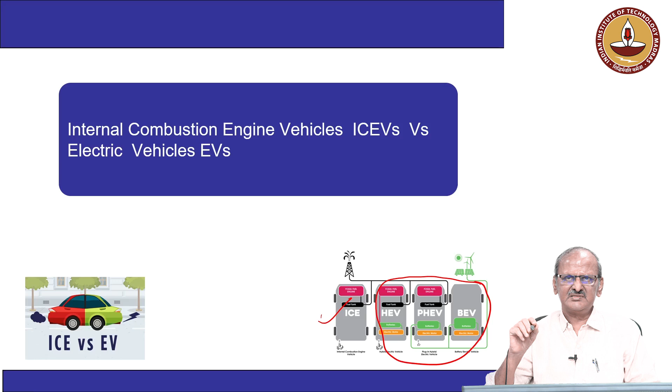In the next lecture, we are going to discuss internal combustion engine vehicles, which are the current portfolio vehicles we use, versus electric vehicles, EVs. People started calling them ICE vehicles, internal combustion engine. It can be petrol driven, gas driven like LPG and CNG, or diesel driven. These are all called IC engine vehicles. Now we are going to compare that with all-electric vehicles: what are the features, the benefits, and how it is achieved.

If you take this example, this is a gasoline vehicle. Gasoline is nothing but petrol, and you have the all-electric vehicle. All-electric vehicle means a battery electric vehicle, not a hybrid, not a plug-in hybrid. If you take the IC engine vehicle, the important components, aggregates: primarily the prime mover is the internal combustion engine. Those not familiar with automobile engineering can take any very basic automobile engineering book to learn about it. Combustion is happening internal to the engine.

What is an external combustion engine? A steam engine. You put coal under it, firing happens, the boiler produces the steam. So this is the internal combustion engine. Then we have the fuel system, the fueling system. Then you have an exhaust system, a fuel pump, a fuel tank and fuel filling facility.

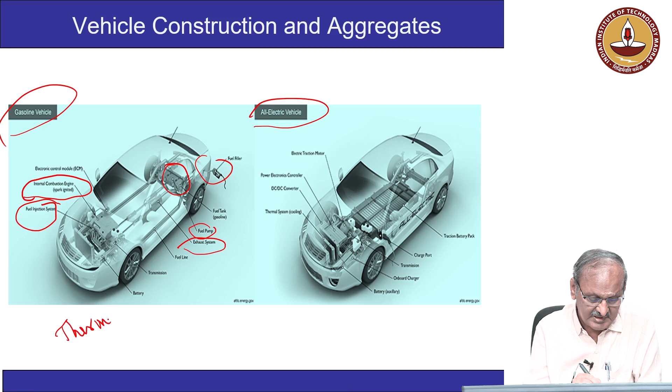Then here you will have a thermal system: thermal management, cooling system. Then you will have an air intake system. Then HVAC, heating, ventilation and air conditioning. All these are part of the current vehicle portfolio. Also, you will have a transmission system: the clutch, gearbox, gear shift mechanism, all that.

Then you have the connection. If it is a front drive, it is connected like this, or if it is a rear drive, you have a propeller shaft, center joint bearing, then rear axle. All this is part of the transmission system. So it has many rotating parts, many actuations, like a gear shift mechanism, a clutch mechanism, and all that.

As compared to that, if you take an electric vehicle, the basic prime mover is a traction motor. This is what gives the drive to the wheels. The traction motor is energized by a traction battery pack, which gives the energy to the motor. Whenever electric energy is supplied to the motor, it will start working. How is that done? With the vehicle control system, you have the accelerator pedal, saying I want to start, move, or accelerate the vehicle.

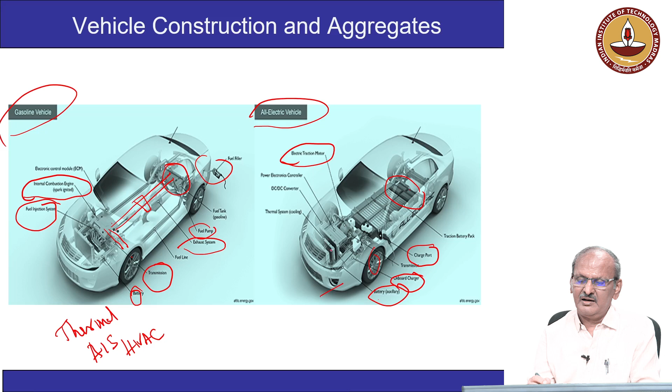Then you have an auxiliary battery, synonymous with the battery here, which takes care of all auxiliary requirements, like lighting, wipers and such. Then you have a thermal cooling system. It can cool the motor, the battery pack, BTMS, and also the power electronics, depending on the configuration. Of course, the HVAC system is similar, but the drives and other things are different.

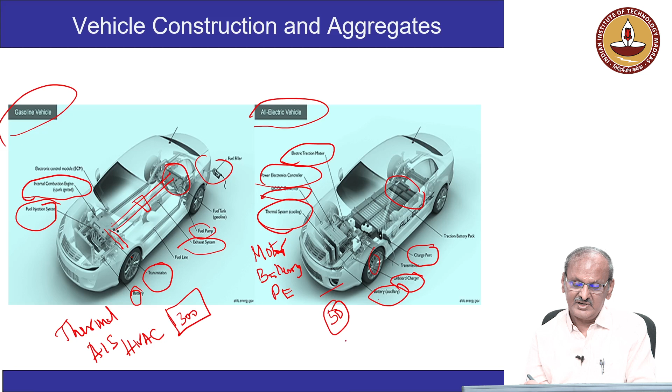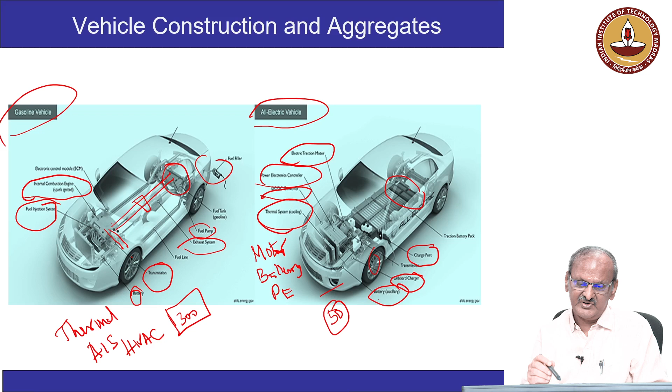Then you have a DC-DC converter and power electronics. All these are the aggregates. As compared to that, see the number of parts. For example, if 300 parts are there, here it is only one-fifth or one-sixth of that, only 50 parts, because so many parts are removed. Because of that, maintenance and attention required are less, less vibration, easier to maintain. All these are the benefits when you go for the electric vehicle.

So here are all the losses. If you take whatever energy you give, internal combustion engine, 1 liter of diesel or petrol, what is the calorific value, and what are all the losses? It has several losses.

Engine loss is 68%, because the IC engine is capable of giving delivery of about 30% roughly. The remaining 70% goes as waste heat through the cooling system. Heat is lost due to the exhaust system, also frictional losses - thermal losses such as radiator, exhaust, combustion and pumping, frictional losses, all of it.

Then auxiliary electrical loss, idle loss, then drivetrain loss. Every joint, every bearing also has a lot of friction. When the work is done, a lot of heat is generated, which is also consumption of energy.

Power to the wheel comes to only 16 to 25%. So we give, say for example, some X kilocalorie from the petrol, but what you are getting as output, power to wheel, is only 16 to 25%.

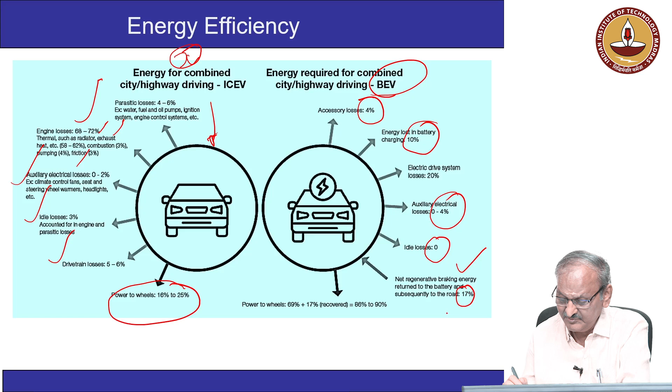If you see the electric drive system, the motor itself is 90% efficient, but if you take all the transmission and other parts, it is 20%. Even though it is 20%, if you deduct the gain, net power to the wheel is 69%, plus you are getting 17%. The net benefit is that 86 to 90% is the total gain.

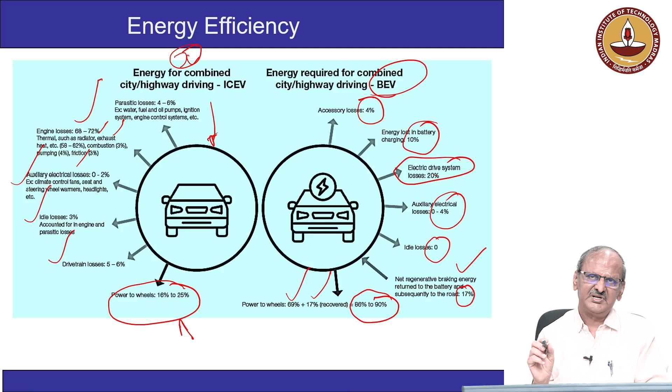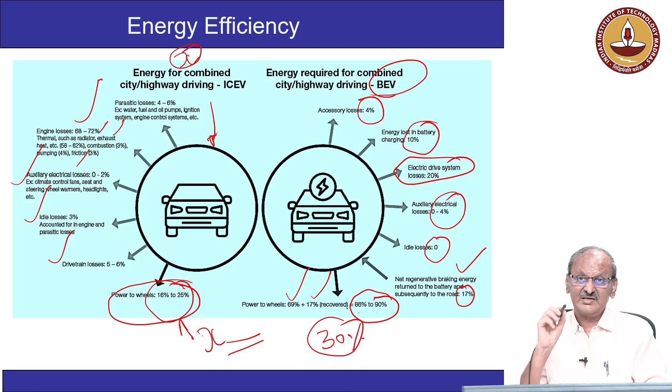So as compared to that, the electric vehicle is efficient in terms of energy usage. Whatever you give as 1 unit of current, you are getting recovery to the work done to the extent of 86 to 90%. Whereas for 1 liter equivalent calorific value, if you convert calorie to electric unit, this is only about 30%. For the same work done, the electric vehicle will consume only 30% of the energy. That is the biggest gain with the electric vehicle.

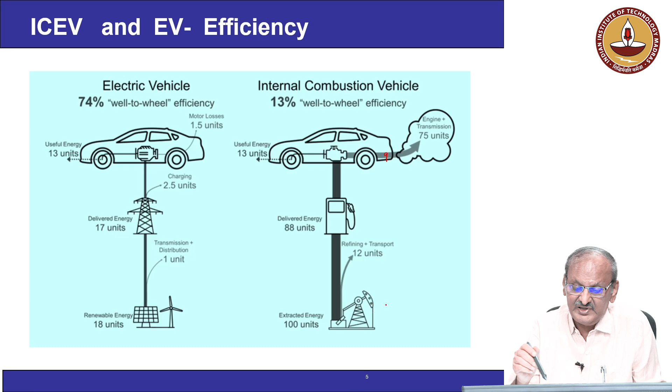So there is another parameter called well to wheel. You get it from the oil well, it is extracted, then petroleum refinery, then petrol is the output that is transported, sent to the pump, then filled to the vehicle. You have lot of losses, even evaporation loss and so many things. Here, well to wheel efficiency is 13%.

We have seen it in the vehicle, but if you take all additional outside factors, similarly if we have renewable energy like solar, wind, then transmission and distribution loss is 1 unit, delivery energy is 18 minus 1, 17 units. Then charging loss is 2.5. Then useful energy, when you give 18, the useful energy is 13 units.

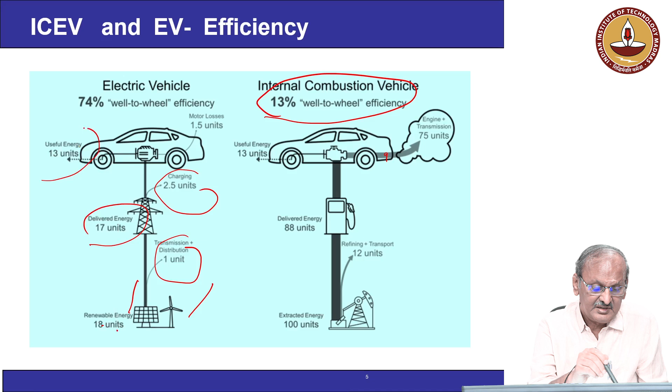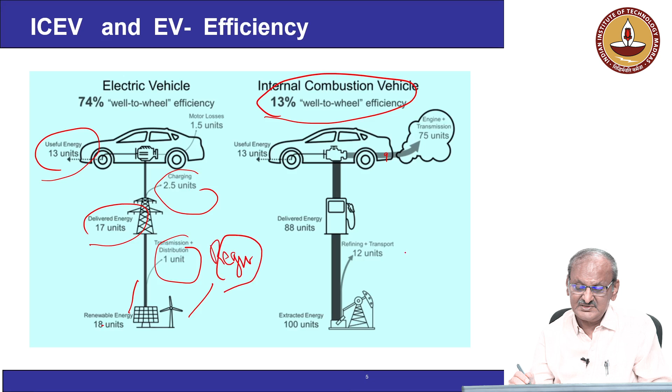Here also you have the energy recuperation region, which is absent here. It is a controlled explosion inside the engine.

Less inertia to overcome for acceleration. Wasted energy, no energy recuperation - you are not getting any.

Whenever you apply the brake, I will explain later - when I apply the brake, the wheels are running, that drives the electric machine, which produces current. Otherwise, in a normal vehicle, it goes as waste. Whenever you apply the brake, enormous heat energy is produced, which goes as waste to the atmosphere.

So, mass distribution and wasted weight - heavy drivetrain, because you have engine, transmission. The engine itself is very heavy compared to an electric motor. Also you have a multi-speed gearbox, clutch system, clutch actuation system, and lever mechanism for propulsion. All that is not available, not there, in the electric vehicle.

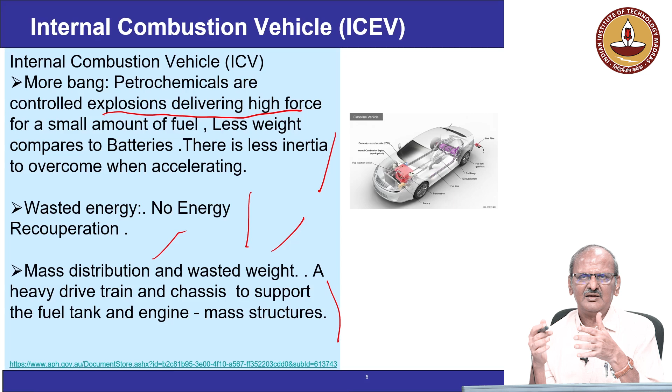So, ICV is known for polluting the atmosphere because of exhaust gas and heat - CO2, CO, oxides of NOx, and hydrocarbons, and particulates. All these are harmful for society, for human beings. In terms of society and environment, these are also called greenhouse gases, GHG.

In the electric vehicle, you are not having this. Here, with an internal combustion engine, you can fill it in 3 to 5 minutes, even 30 or 40 liters of petrol or diesel, very easily. The range is also appropriately fueled - whatever fuel tank size is there, depending on the vehicle model, fuel efficiency and other things, you get a good range. You also have frequent filling stations available.

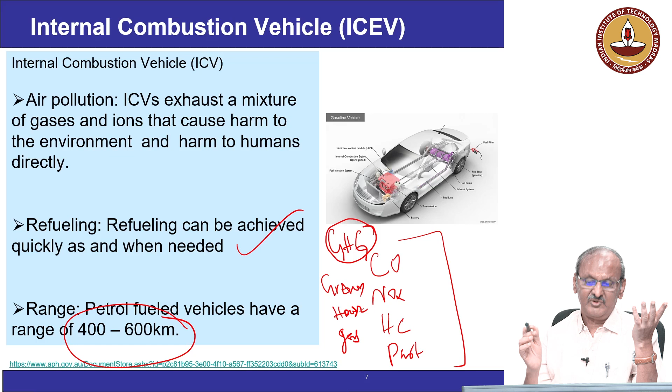If you take a battery electric vehicle, there are multiple topologies there. You need not mount the motor somewhere and connect all that. The wheel itself can be mounted. Wheel motors, hub motors are there, so directly you are mounting on the wheel. That is the option. Smaller mass, the motor itself is very small, and instead of one motor, you can have two motors, three motors like that.

Conservation, it is regenerative braking, right? Most of the vehicle cost, the weight will be in the battery. 50% of this is consumed with battery. Other than that, all the components are lightweighting. More space for the interior, so a lot of space is vacated inside.

Then you have solar paneling. These are all options available. You can put a panel on the roof of the vehicle. Then whenever the vehicle is parked at sunlight or something like that, at that time it can charge the battery.

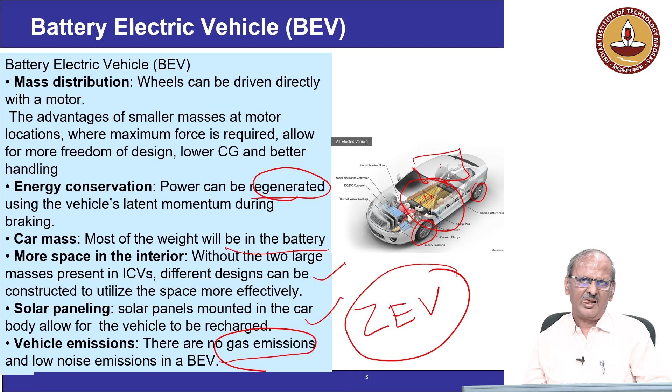So no tailpipe emission, that is why it is called zero emission vehicles. This is what everybody is trying for, zero emission on the tailpipe of the vehicle on the road. All the pollution, where the vehicle is running, there only the vehicle can pollute. We have already seen that, during this corona time, how the environment became very clear because vehicles were not moving. The specific energy of diesel or gas is high, and they emit greenhouse gases. So this is the concern why we are switching.

You can refill as frequently as possible, you can have good range. Short refilling time, less than 5 minutes. Fuel tank takes relatively little space compared to battery. Battery is voluminous and heavy weight, also costly. Higher maintenance cost because of so many moving parts. Brake energy recuperation is not recovered for IC, but for electric you have regenerative braking possible, less maintenance, but battery pack is large in space, weight, and cost.

Charging time varies. You have fast charging, 20 minutes, 30 minutes like that, and you have overnight charging, 8 hours. So you cannot use the vehicle when it is charging, that is also important. Travel range depends on the vehicle. Now vehicles have come to the extent of 300 kilometers, 400, even some vehicles now have 600 kilometer range. No tailpipe emission, no greenhouse gas, no GHG, but low specific energy of the battery.

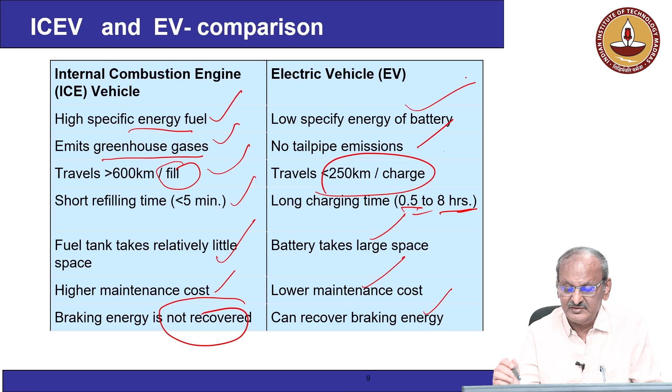That is why you are having a large pack. Internal combustion engine running cost is high today, real value, you know that. Also for a country like India, it is depending on import. If you take electric, you need not import electricity, it can be domestically produced.

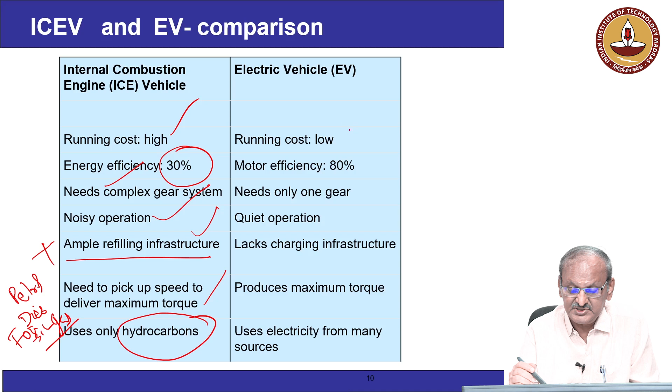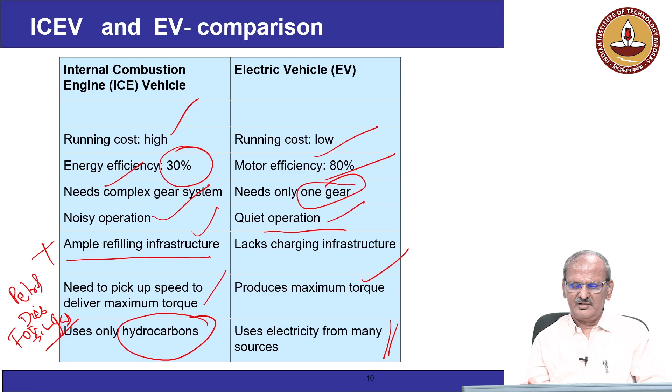Opposite, low running cost, motor efficiency is 80%. Only one gear, simple gear train - this is basically to match the speed of the motor to the speed of the wheel at a given speed. It's very quiet, noise is not there for the electric vehicle. It produces max torque right from zero speed - technically, as soon as you start, the torque is available. You can get electricity from many sources, not only fossil fuel, it can be solar power, wind power, hydroelectric power, or conventional nuclear power or thermal. There are a lot of green energy options very much available.

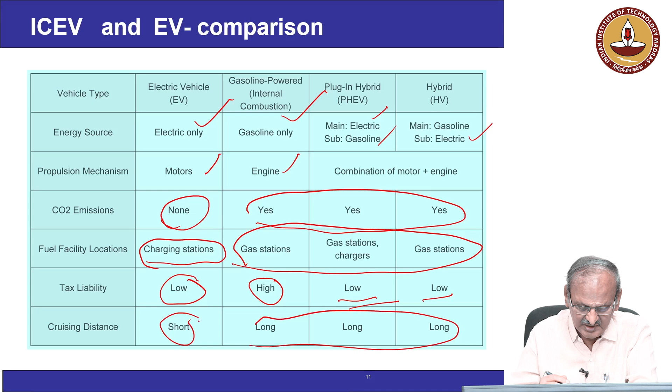Here all negative. Then fuel facility - charging station, which is evolving, but many stations are available. Tax liability low, lot of subsidy, lot of promotion is available, that is not available for this. Here they are extending it for hybrid also. Cruising distance short - this means range. So long range, comparatively over time, this will also get improved.

We have seen that green mobility, higher efficiency, dynamic performance, reliability, torque vectoring - I will explain that. Energy recuperation, regenerative braking, service and maintenance is easier.